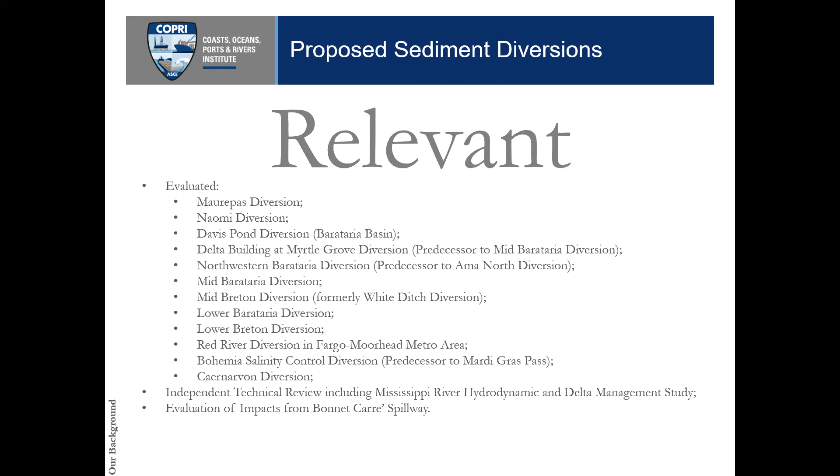And our combined relevant experience includes all these diversions. I was part of the independent technical review team for the 4 lower river diversions. But my diversion experience goes back about 20 years. I was working on not a dissertation, but the thesis in graduate school for the Maurepas diversion that did change, but at the time it was part of the 2050 coast plan that the state of Louisiana was putting forth back in the 90s. And then I worked on and off on different projects since. And then, of course, Dr. Moby Solangi has been involved in the evaluation of the impacts from the Bonnet Carré spillway and was a key member of the team for Mississippi for the BP spill.

And I think that we're just going to try to distill this down in simple terms for you all in Mississippi so that you understand, you can trust us, that we are going to talk in layman terms mostly, and that these are complex projects and they're being driven by complex processes. And I think it's important to understand them, like I said, in simple terms. We're going to first start with this video, and it's on a forum that was held both on the spillway and the diversions, and it was held last year. It was put on by the local newspaper, Sun Herald.

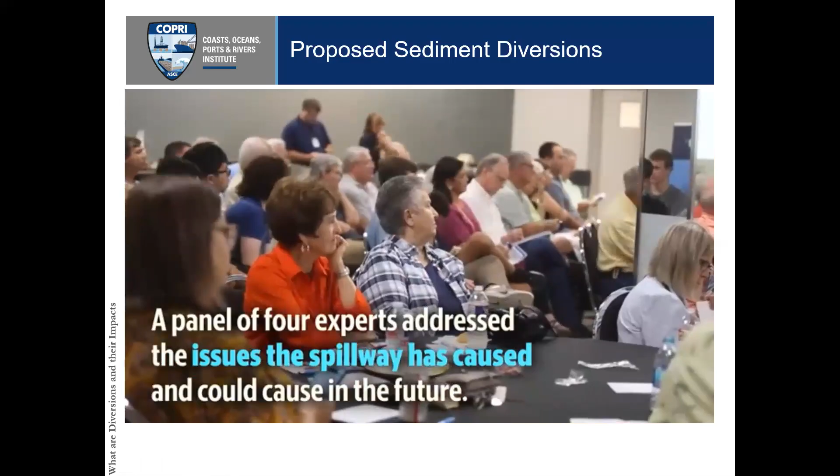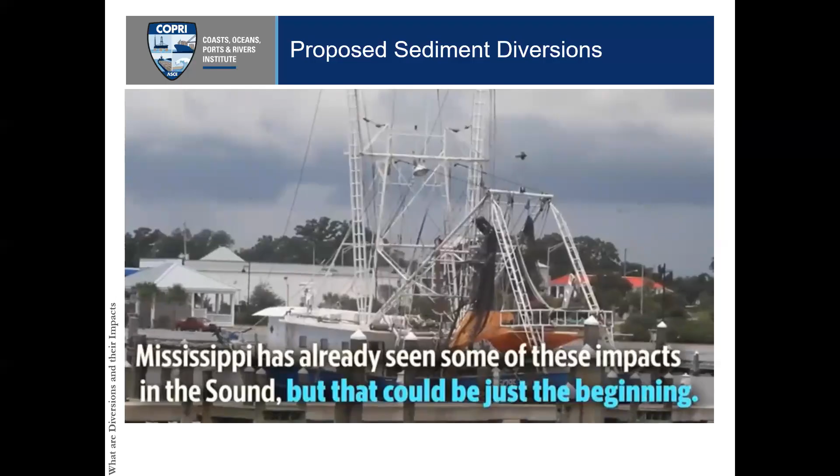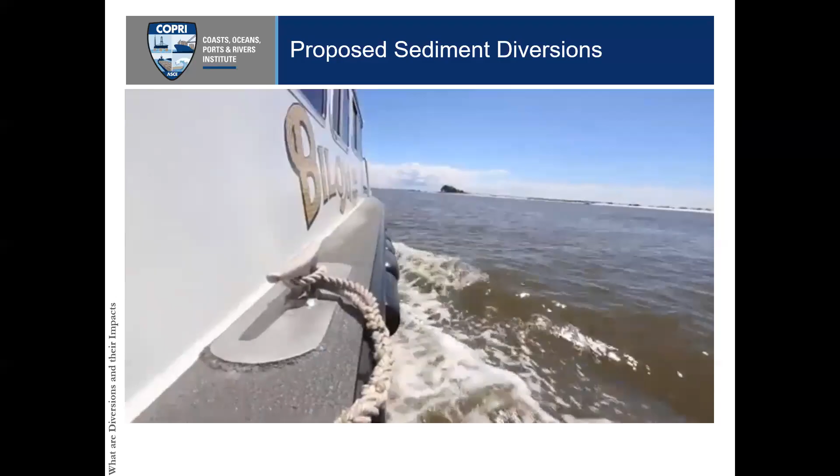What is happening is something that is a game changer, that we have never seen like this happen in our lifetime. Your life and your children's life and your grandchildren's life is about to change. In the wintertime, when the water's cooler, it's the wet time of year when you get a lot of rain anyway. That was my point. Why they couldn't get ahead of the game, when they can predict big rivers rising. In Louisiana, I'm not sure about the statistics in Mississippi, but we had a little over 60% reduction in the shrimp landings during brown shrimp season. We had 90 to 100% mortality rates on our oysters. We had a 35% reduction in our landings in blue crab. So that's pretty significant. This freshwater has taken a toll on all of our fisheries, and we're still monitoring it. We're still looking at our commercial landings and doing our assessment, but we won't really know the effects of a lot of this until a couple of years down the road.

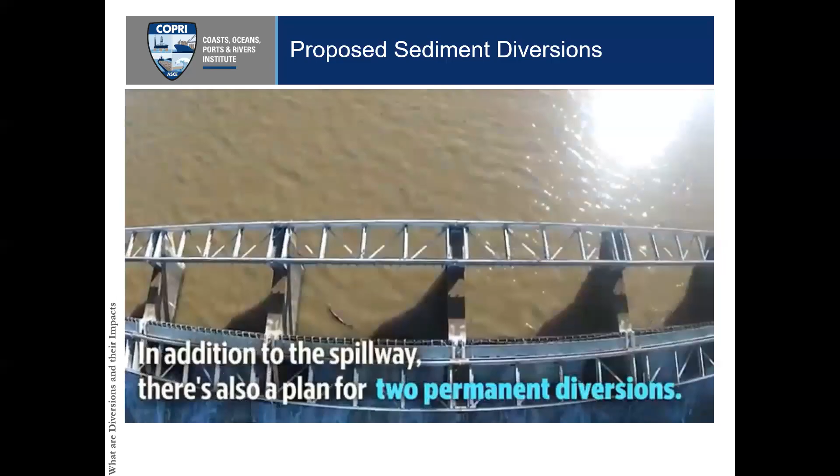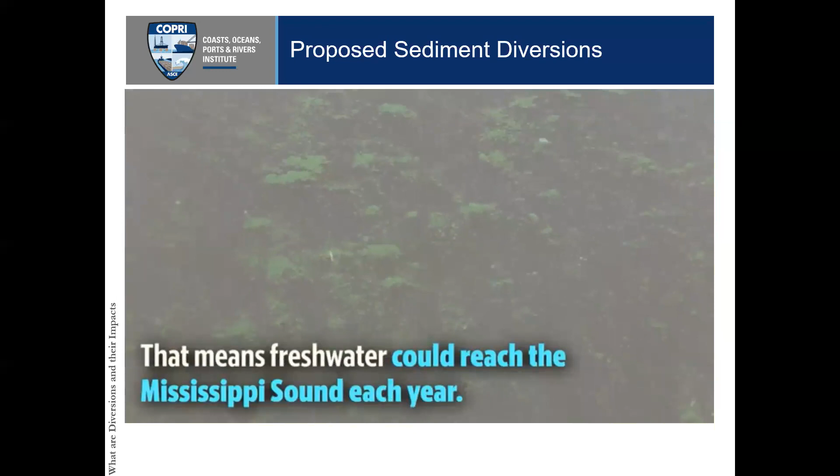But Mid-Barataria Diversion is proposed to have a capacity of 75,000 cubic feet a second, which is about half of what the spillway averaged. But this year, it could have been operated for 201 days, when the spillway was operated for 123. So it's less water, but for a longer period of time.

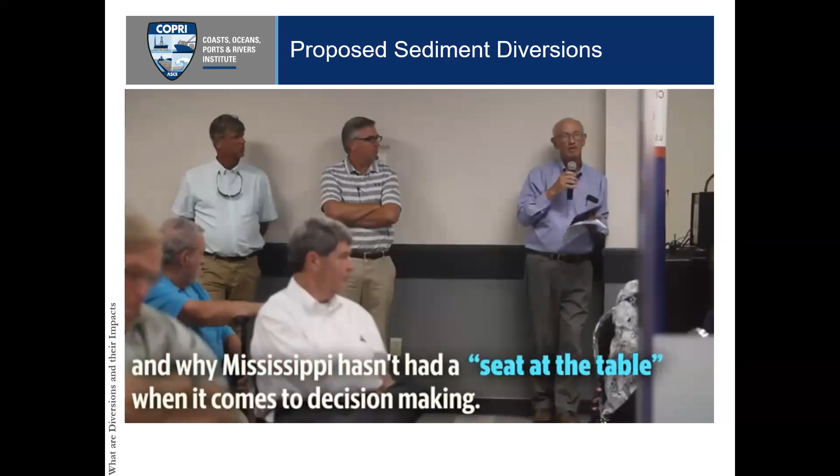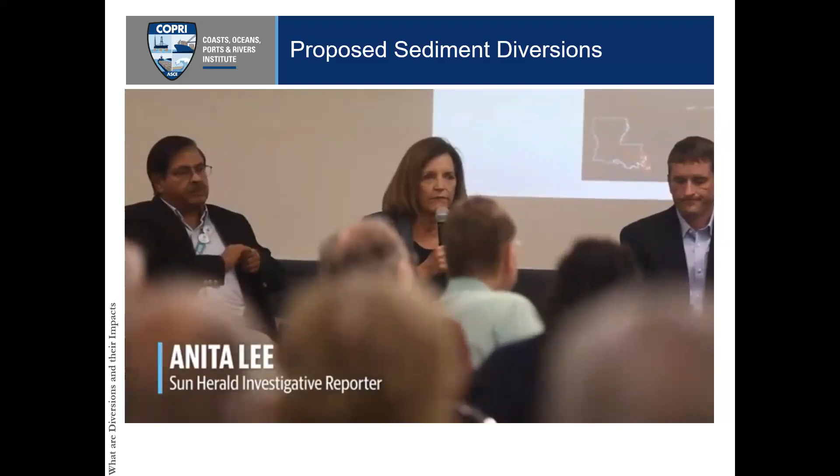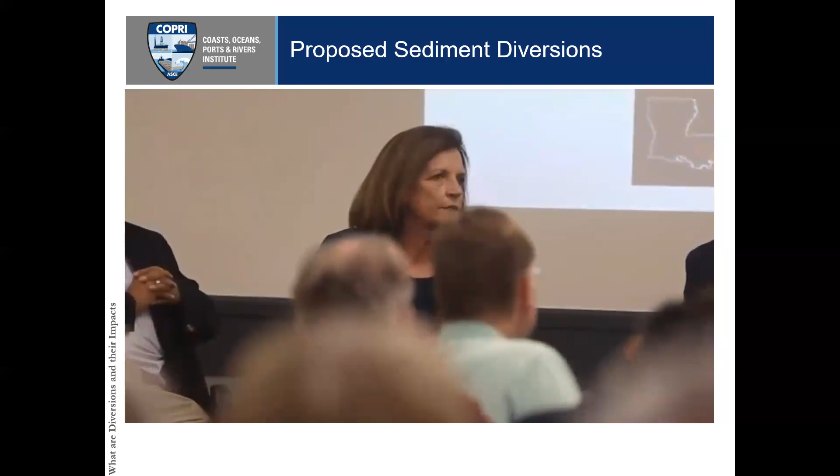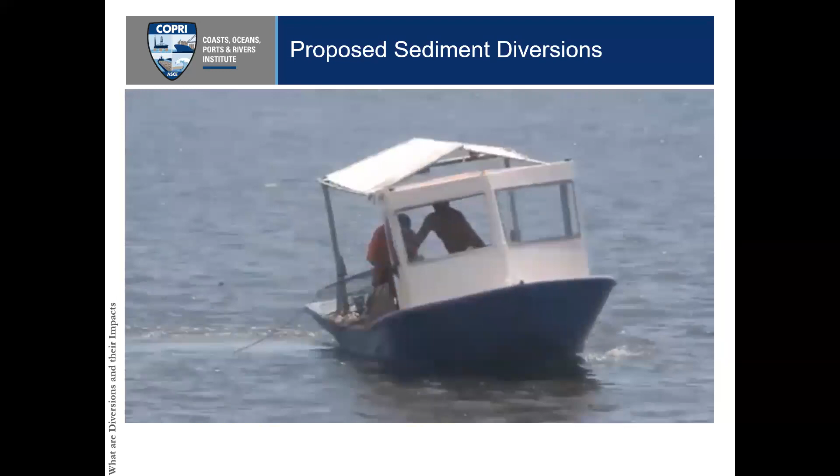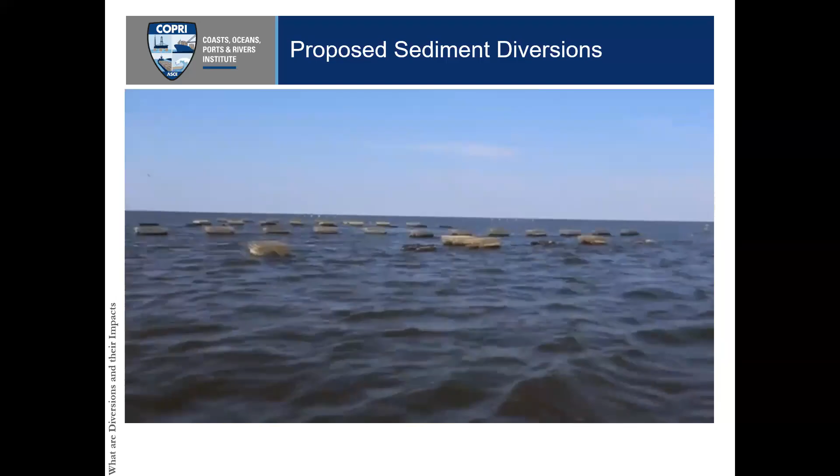But it's even more disturbing when you look at this Mid-Barataria diversion and think about how little, no thought has been given to Mississippi with this diversion, none. And I ask, is anyone from Mississippi at these Coastal Protection and Restoration Authority meetings? No, they haven't been there. Maybe they're now, but folks in this room and folks on the coast are really going to have to be responsible for getting their elected and community leaders to stand up for Mississippi in this, because nobody's listening.

And I know past studies of the environmental impacts of the Bonnet Carré really have focused on Louisiana waters. And after people started speaking up with these openings this year, they're going to include Mississippi in the current study of what the impact is.

So as you can see in that video, which had subtitles, about how serious these projects are to divert more river water. So with that, I'm going to turn the presentation over to Dr. Moby Solangi. Well, yes, thank you, Dennis. This is an extremely important issue.

And if you look at it, the basic problem we have is the Mississippi River watershed is the largest in North America. It drains the river waters from many rivers from 31 states and 2 provinces in Canada. And along with the sediment, it's also a very highly polluted river. It brings in industrial, agricultural, sewage, and other wastes. And as it comes down, you can see the Mississippi, the Missouri, the Tennessee, the Red, all these rivers, they all merge into one as they come into Louisiana.

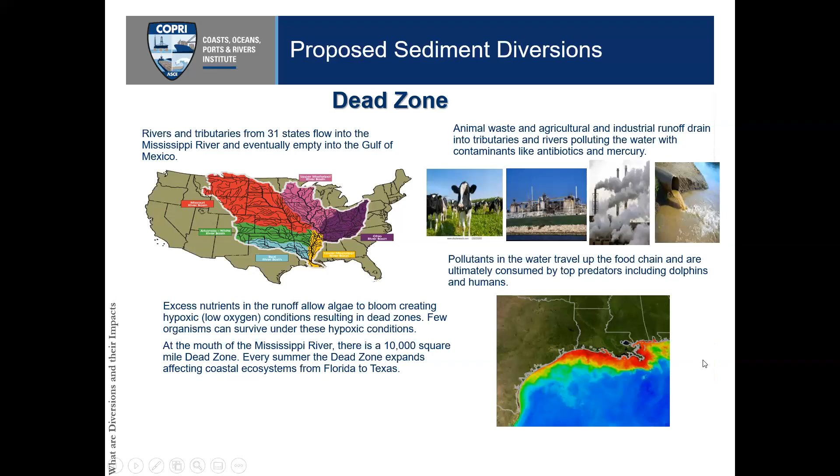And when the drain is clogged and you don't open it up and you create these little holes on the side of the drain, you get these diversions. And so you have this non-indigenous water going into areas that suffer. And I think it's important for folks in Mississippi to understand that Mississippi Sound and any of its waters are not connected to the Mississippi River. So here's the Mississippi River.

One of the studies that we did in 2019 was the effect of the Bonnet Carré spillway. Now here's the Bonnet Carré spillway. It opens into this huge lake, which is called Lake Pontchartrain. And then there's this very small outlet, which is called the Rigolets. So what you end up seeing is, first this has to fill up. This becomes like a freshwater lake. There are also other rivers that flow into Lake Pontchartrain. So this is a constant impact. But when trillions and trillions of gallons come into the non-indigenous areas, there's an impact.

But if you look at it, this particular map was done on April 15 to 21 when the Bonnet Carré had opened. The lighter color shows you low salinity, and the red color shows you high salinity, and as it changes, you see a gradation. But look at this area. There are 5 different diversions, and I'm sure that Dennis is going to talk about them. All of this is fresh water. And if you're looking at the geography, folks in Mississippi need to realize that this is Mississippi Sound, this is Breton Sound, and this is Chandeleur Sound.

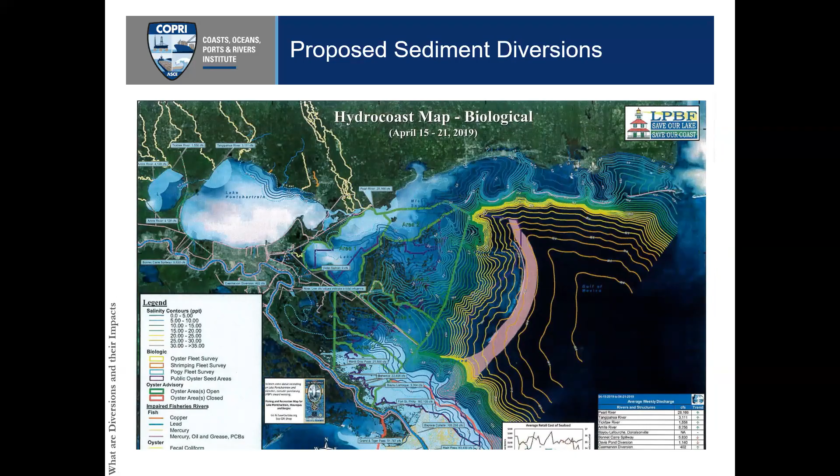So when you cut off the legs and hands of part of the ecosystem, the rest of it is going to suffer. And what has happened, you want to go to the next slide? What we saw was, due to the impact of trillions and trillions of gallons of river water, and I hate to use the word freshwater, people think it is a spring flowing in. This has so much pollutants in it, and insecticides, pesticides, hydrocarbons, all sorts of fertilizers.

Now, remember, these are top predators. They are basically the canary in the mine. They are the biological indicator of the environment. But they also serve like a black box. They store the information in their bodies, like their blubber will accumulate the insecticides and pesticides. And so these animals, as we study, reveal what may be going on.

For example, when you look at their teeth and you section them, just like a tree, there are little circular areas of their development, and you can tell at what stage in their life they were encountering some stressful events. So these black boxes become an important tool, so do the sea turtles. So we had some, next slide.

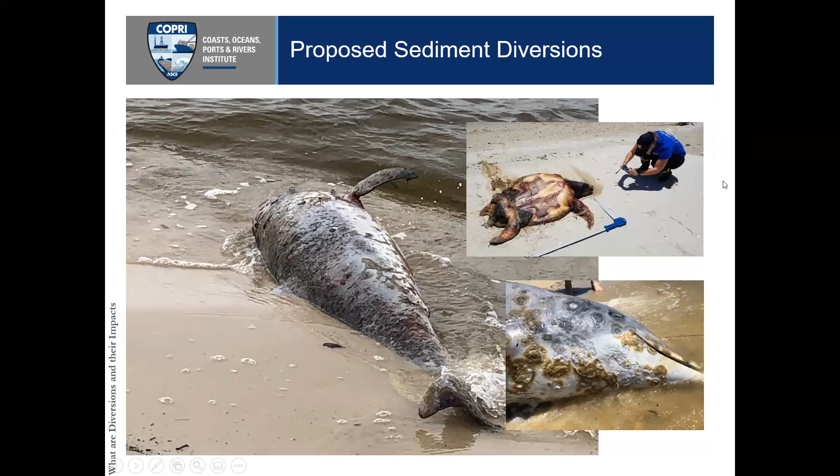Now, if you look in 2010, we had 91 dolphins and 309 sea turtles that we recovered. And this was when we had thousands of people in remote areas looking for animals, islands, marshes, cleanup crews all over the place. The most we found was 91 dolphins and 309 sea turtles. Most of the sea turtles were the most endangered sea turtle species, the Kemp's Ridley. We do have 5 species. We have the loggerhead, we have the Kemp's, the green, and so on and so forth.

But the Kemp's Ridley, the Mississippi Sound has the highest population of Atlantic bottlenose dolphin in the United States. It is also a nursery for baby dolphins, and it's also a critical habitat for the Kemp's Ridley sea turtle, which only lays eggs in Mexico, and the adults spend their life in the United States. And so a turtle has 1 in 10,000 chance of becoming an adult. And these long-lived species, if their adult dies, it takes many, many years for them to reproduce and recover.

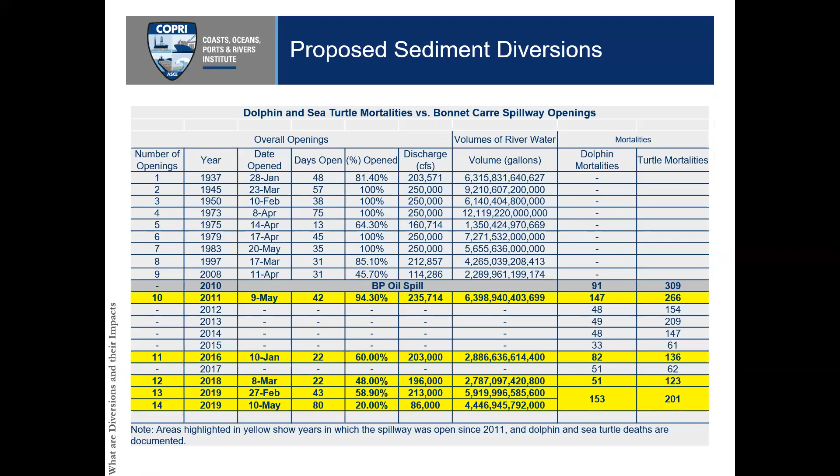Next slide. You can see how after the opening of the Bonnet Carré spillway, you can see these orange lines showing the tremendous increase in the bottlenose dolphin strandings per month. And here you can see the areas that were seen in abundance in terms of strandings. One of the reasons Louisiana was less is political. The Louisiana Department of Wildlife was under a lot of pressure, and I'm sure Dennis will be talking about the waiver. They didn't want a lot of these animals to be recovered.

They decided not to respond, and NOAA had to come in to find out where the animals were dying and the cause of death. So there was a little bit of a lag in the scientific data, but still the numbers in Louisiana were second to Mississippi.

We did have some hot spots in the panhandle of Florida and Alabama, but that was because 2019 was a wet year and the indigenous rivers probably had some impact, but here is where most of the impact was. Next slide.

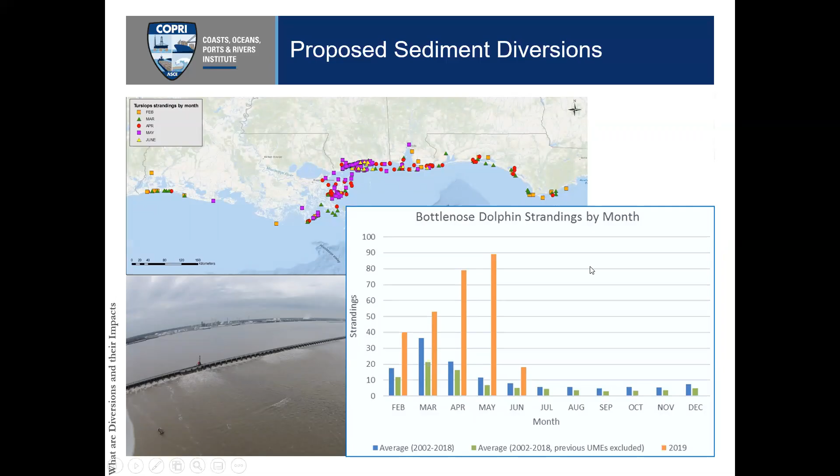Here's the problem, and I'm going to let Dennis kind of chime in as we discuss this subject. The Mississippi River, we human beings have changed its course, and to maintain its course, we have levees, we have diversions to keep that river in this particular course. Its natural course was through the Atchafalaya Basin, and of course, to protect it from flooding, it was distributed 70% going this way and 30% going through the Atchafalaya Bay.

But the irony is that those flood-prone areas have now been developed, and now the Corps of Engineers has to go and protect it. So as the river flows down, you've got the Morganza spillway. There are some regulations that say at what speed of water that one spillway would open, and the Morganza hasn't opened, as far as I can remember, for the past 25, 40 years. All the water comes down, and the Morganza spillway was to protect Baton Rouge, and then of course the Bonnet Carré to protect New Orleans.

And then of course you have all these other diversions that are putting out water into the Breton Sound, and indirectly through Lake Pontchartrain into the Mississippi Sound. So we have a very serious problem. It's not just the salinity issue. We have nutrients, we have insecticides, pesticides, and so on and so forth. This is a very rich fishery area on both sides of the river. Dennis will talk about many other factors that have caused the land loss, not just the way the Mississippi River water has been channeled.

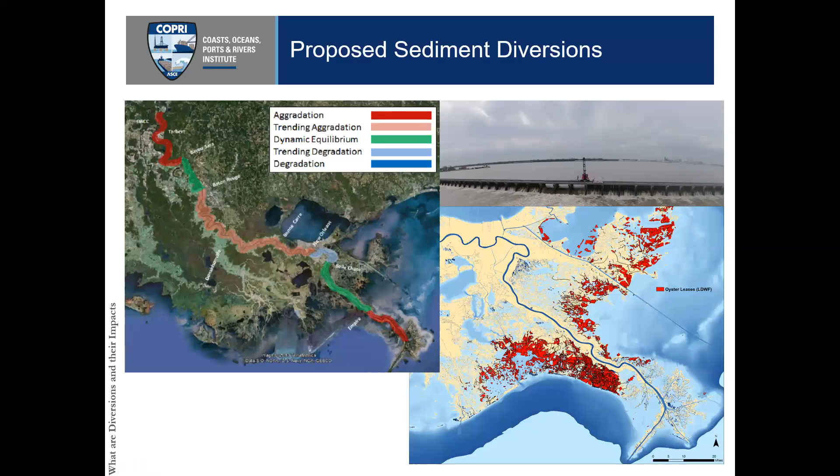Thank you, Moby. Okay.

And so I just want to follow up on Moby's comment. A lot of different interventions have been done on the river to manage it over the years, and the idea of diverting sediment out of it actually is not a new idea. It was discussed and debated 150 plus years ago in New Orleans.

So the state of Louisiana participated in a federal study. It was named the Mississippi River Hydrodynamic Delta Management Study. It is a study that was abandoned by Louisiana, which withdrew as a sponsor, but it did help construct the initial basin-wide model. And the models that were used, they were coupled with other models, including some vegetation models, and they predicted that the river water inundation on the brackish marsh will create a significant biomass loss of up to 66%

in 10 days. And of course, all federal studies of this nature have a peer review panel, and they reviewed the output, and they determined the mortality could be on the order of 50% within 2 months. So the natural process of converting this estuarine system into a lower salinity system will create a die-off. It will not only impact the vegetation in the brackish marsh, but the benthic communities and all of the species in the food web.

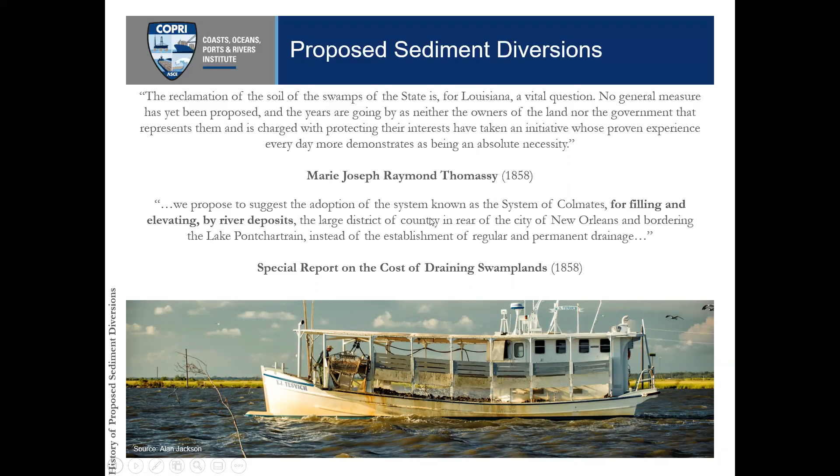And the language is very similar to the purpose and need of the sediment diversion projects, and that is river water charged with alluvium to be directed upon the land and to create the sedimentation process that is equivalent to delta building. And there are several reports. I'd be happy to share those with anybody viewing this presentation.

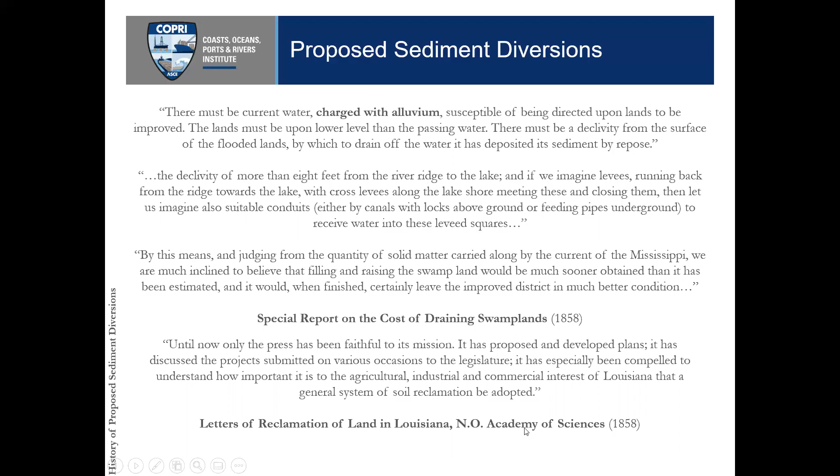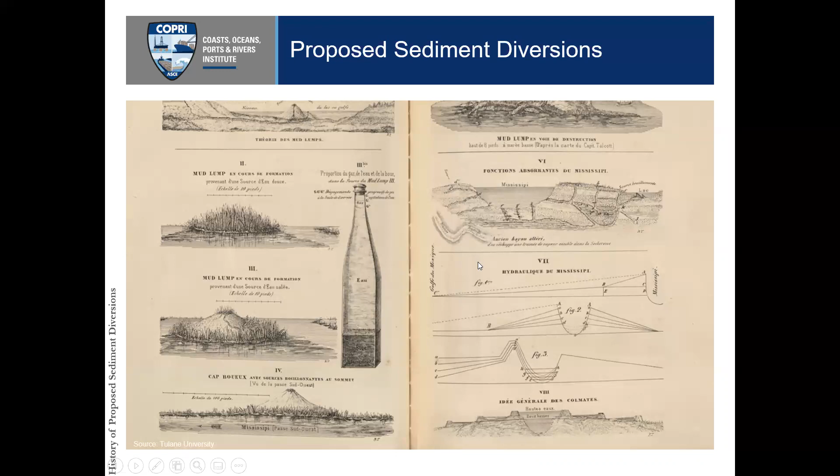The concept of diverting the river reemerged in the early 1970s under the guidance and leadership of Woody Gagliano. He was the first one that drew a map in recent times where diversions were proposed. And then it got documented in the Comprehensive Master Plan in 1993, then into Coast 2050. And of course, we had the EIS for both Davis Pond and Caernarvon; it actually started in the 80s, and all of that sort of built up into what is called LCA, the Louisiana Coastal Area, which was authorized right during the year of Katrina.

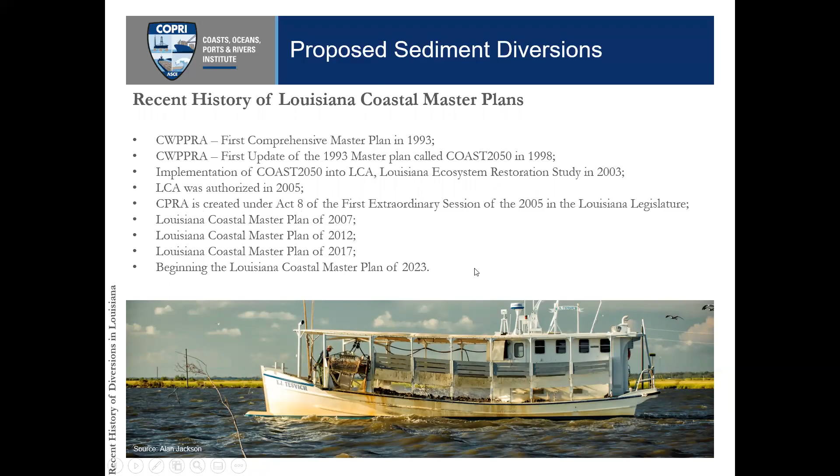And then after Katrina, the CPRA was formed, and it was mandated every 5 years that a coastal master plan be passed by the legislature. The next master plan will be in 2023. So these two projects are in the master plan, and they're being brought forward under an alternative delivery method called construction management at risk. And we will go over both of them, the first one being Mid-Barataria. They're very near each other, within 10 river miles, and one's on the left descending bank and the other's on the right descending bank. And they're both 75,000 CFS.

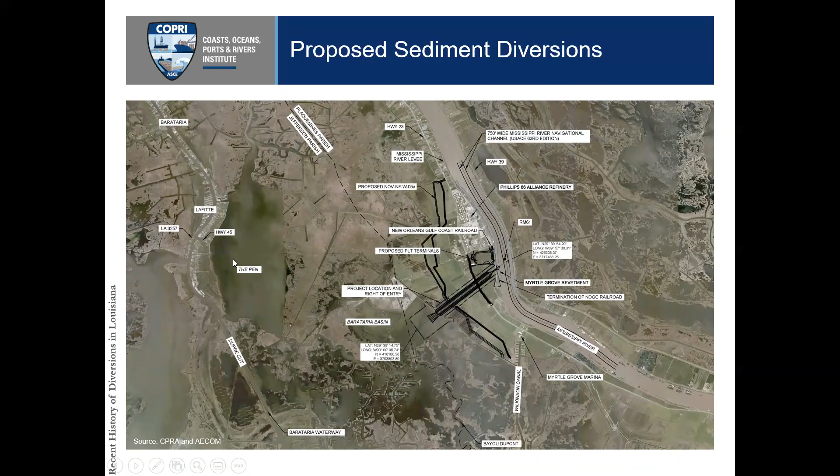So Mid-Barataria, it's a hardened diversion canal, if you can see that. And at the river, there's a Tainter Gate complex, and there's an outfall, and it's going to penetrate two levees. One is at the river, and one's a hurricane protection levee, and it will go across an existing railroad right-of-way and LA 23, so there'll be bridges built, and there'll be other facilities that will need to be modified. Here's a closer view of it. Here's the riverside where the Tainter Gates will sit in the hardened channel, and the different transportation facilities and levees that it'll penetrate.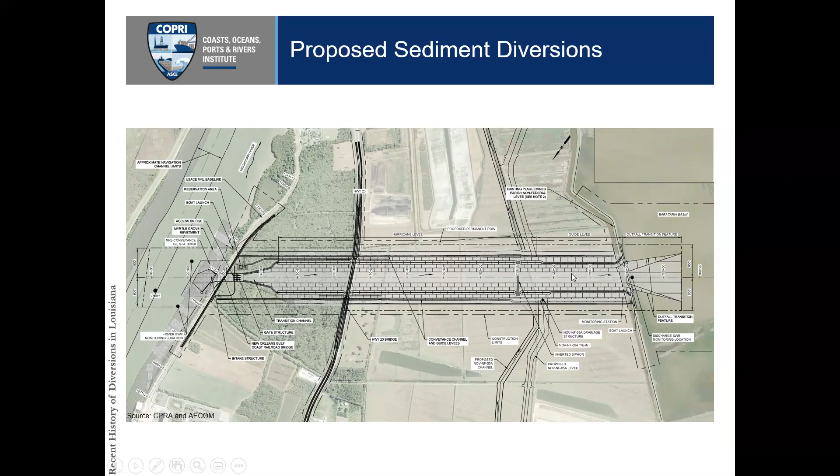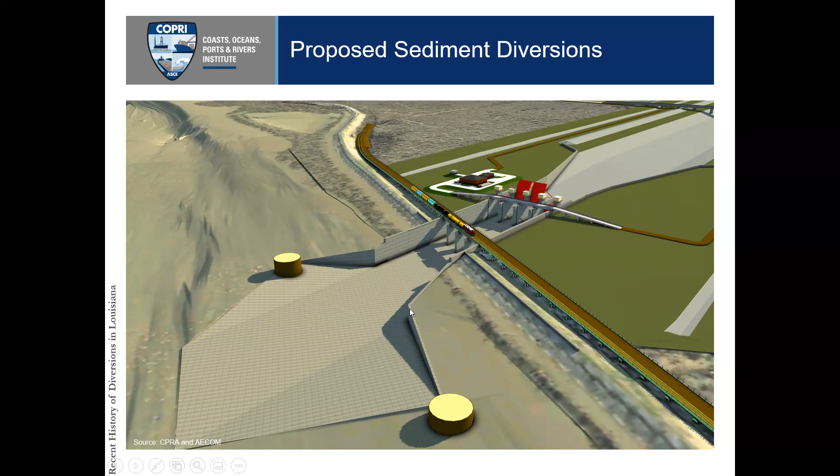Here's a rendering of the intake at the river. The river water will go through this intake structure and through these Tainter Gates into the diversion channel. That's just a closer image of it. It shows the enormity of this complex and the scale.

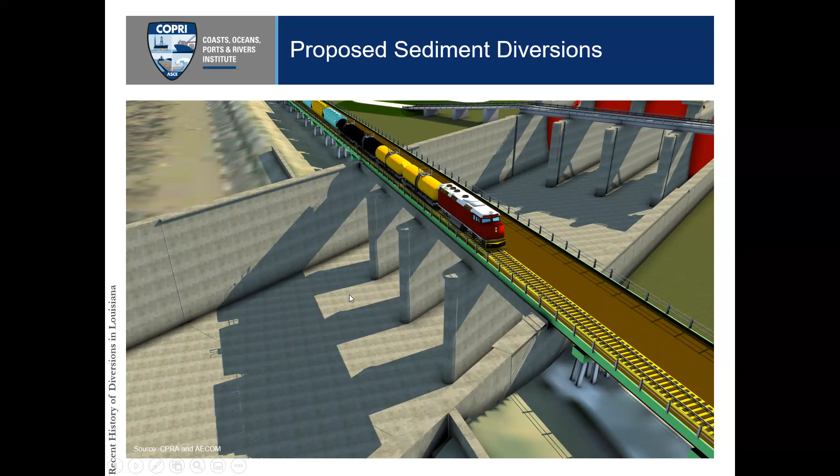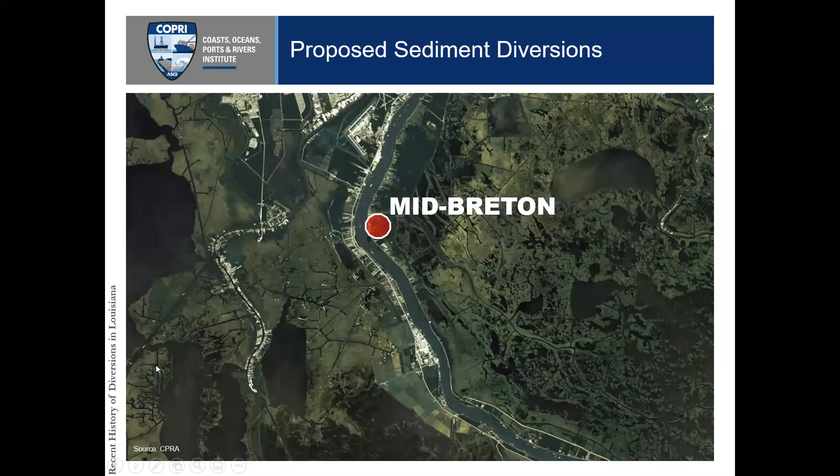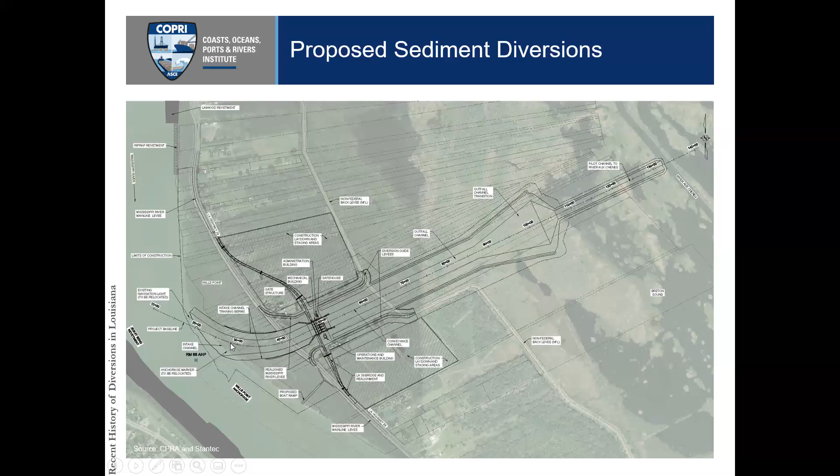Mid-Breton, which is on the east side, on the state of Mississippi side, it's laid out. There are some similarities and some differences, but it also has to penetrate the river levee, and it does cross a highway there, which will be elevated, and then through a hurricane protection levee. And this is just a rendering of what it looks like. Again, there's some Tainter Gates there.

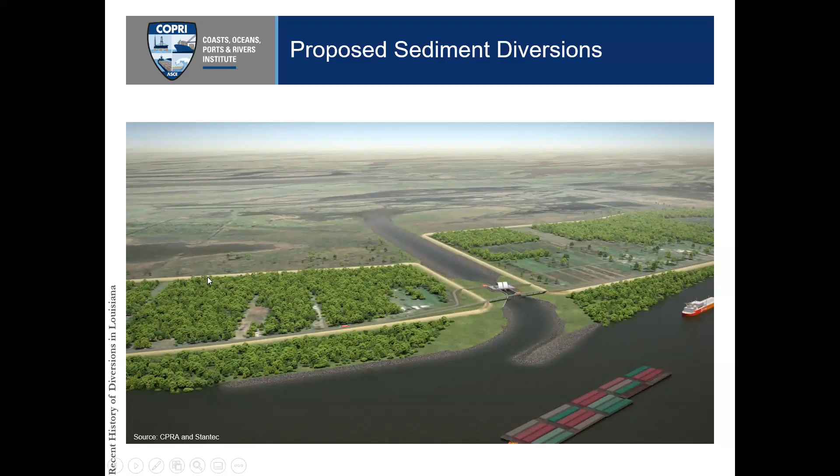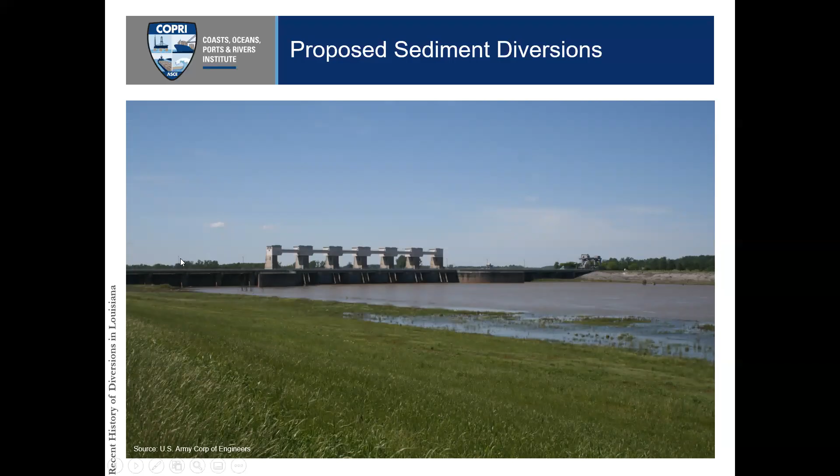So these are some Tainter gates that you can see that are in place at the Old River Control Complex, which is at the confluence of the Red River, the Atchafalaya River, and the Mississippi River. And they're very large. The capacity of this structure is much larger than the diversions, but it does give you some idea of the scale of these heavy civil works projects.

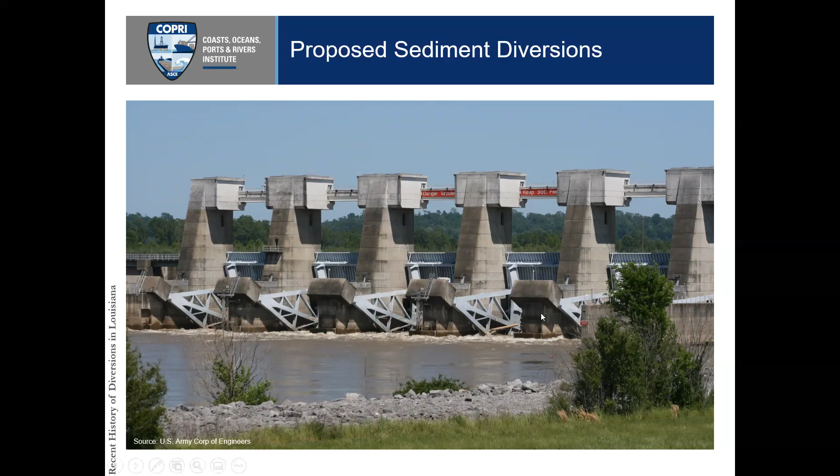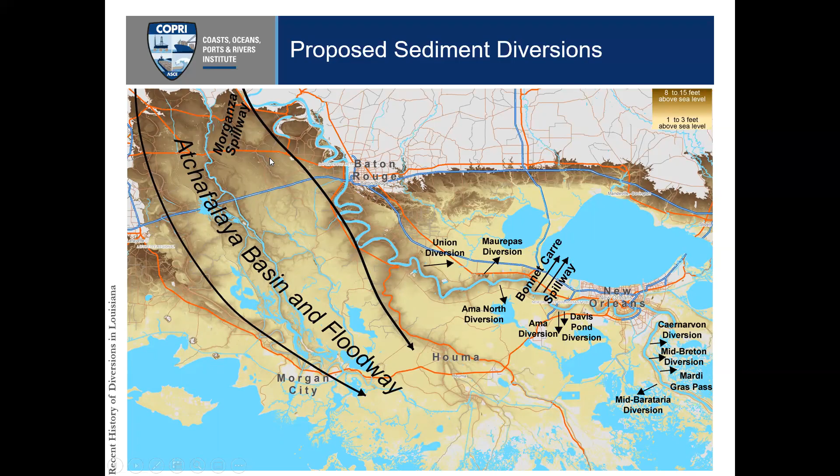Again, if you look at the Old River Control Complex, you can see that very similar structure. You have a very similar diversion channel that was used for a hydropower plant that is in place today. It's about 100,000 CFS capacity, roughly. And they have a hardened channel that diverts the river into this power plant.

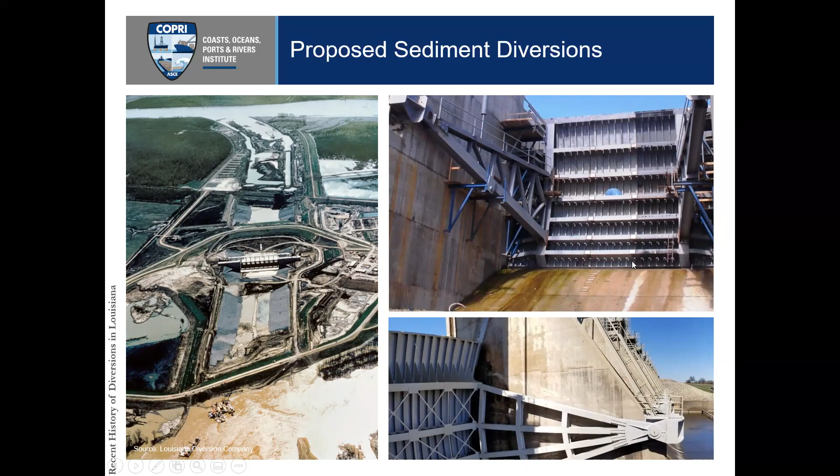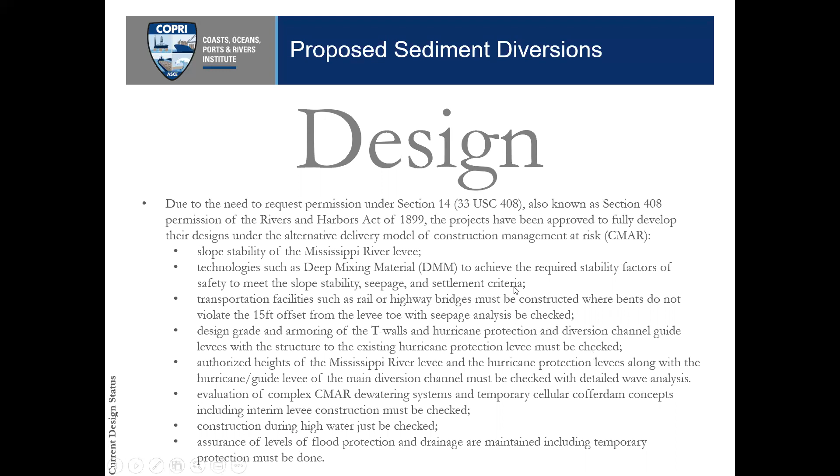So some of the design issues that come up, and again, why they're using the alternative delivery method of CMAR, is so that they can get a 408 permission. It allows them to advance the design up to 95% and deal with issues like slope stability, deep soil mixing, offsets, tie-ins, etc. Concurrently, they are processing the project through NEPA to get a 404 permit and a Section 10 permit. And of course, they follow the guidelines set by the legislation that was passed in 1969.

However, they did take advantage of some programs. One is the FAST Act, which is an expedited permitting process. It allows for all of the partners to be housed in one dashboard. They also did get a congressional waiver of the Marine Mammal Protection Act. And there have been attempts to redefine the essential fish habitat. And we'll get into that.

One of the things I think is important to remember is that the Oil Pollution Act, which sets the NRDA standards for collateral injury, does not apply to Mid-Breton because right now they're not seeking NRDA funding. However, it is still all BP settlement money, and I believe that the collateral injury standard is something that should be adhered to for the Mid-Breton project.

These are all the tools for all the computer modeling nerds that are watching today. They are working off of the Delft3D basin-wide model. They will do a project level model for Mid-Breton. They are using the MIKE suite of tools that are available. These are very complex and very powerful software. They will also use, I know on the Mid-Barataria diversion channel, they're using FLOW-3D to look at what's going on within the diversion channel itself.

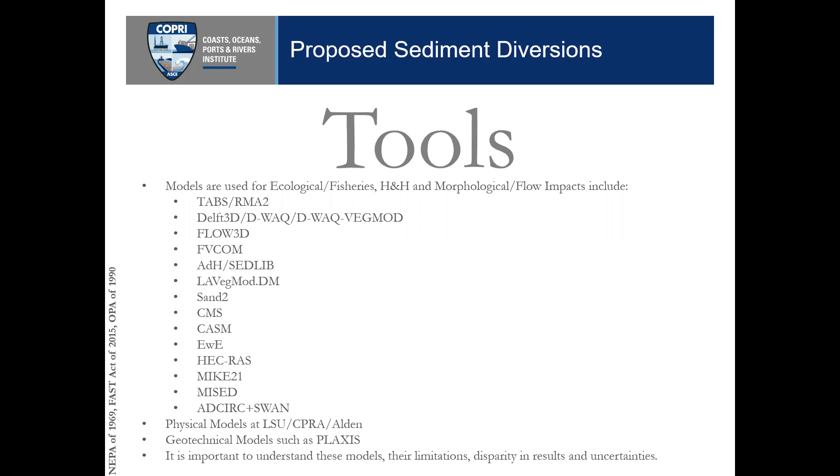This is just some of the language that was in a letter that was written in July of 2019 regarding the definition of essential fish habitat. And they're looking for it to be modified, as it states at the very bottom: modifying the essential fish habitat language will better allow for the implementation of the Louisiana Coastal Master Plan by reducing a project's legal hurdles. And of course, these two diversions are in the Louisiana Master Plan. And the outfall of these two projects are essential fish habitat for many federally managed species.

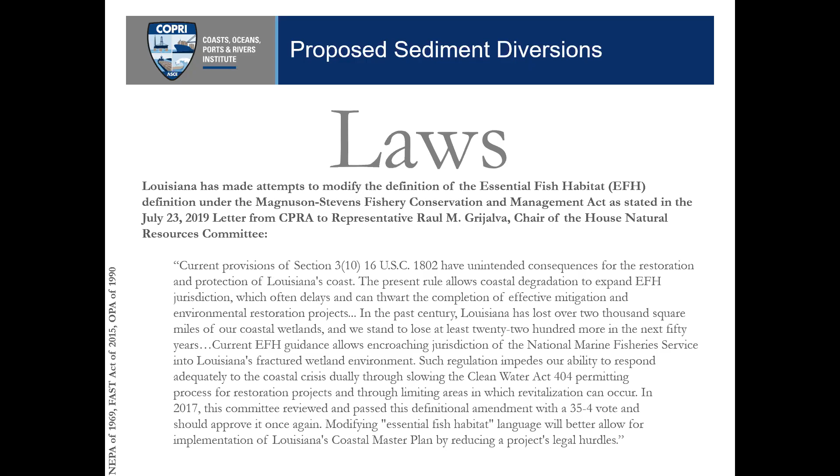They did successfully get a waiver for the Marine Mammal Protection Act, and it was put in the Bipartisan Budget Act of 2018. They first were seeking an administrative route for a waiver, and they got some pushback from NOAA. And so in early 2018, they had this amendment stuck into the budget bill, which allowed them to get the waiver.

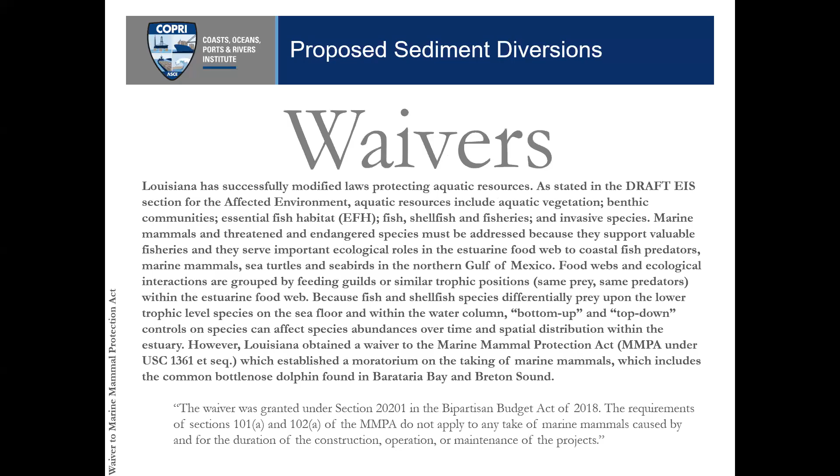On the Mid-Breton project, they have been just finishing up their scoping period. They had sessions online throughout July, and they allowed comments to be submitted until around mid-August; August 16th was the deadline. The draft EIS will be out in the fall of 2022. The formal comment period will end in the fall of 2023. The record of decision is scheduled for January of 2024.

And below that is the Mid-Barataria schedule. And I suggest that the state of Mississippi and all the stakeholders and all of the engineers that work for the different entities in the state of Mississippi get engaged in this process.

Some of those tenets that we all hold dear were mostly started after the 1969 NEPA Act was passed by Congress: the Marine Mammal Protection Act being one, the Endangered Species Act, and the Magnuson-Stevens Fishery Conservation and Management Act.

So these projects all have these guidelines that they have to follow, and the tenets that the state of Mississippi should follow should protect the fisheries, the endangered species, the oysters, oyster reefs, the shrimp, the crabs, the submerged aquatic vegetation, the habitat, also the Mississippi Sound, which has many dolphins, your beaches, your tourism, etc. So I suggest you stay engaged, watch for waivers and amendments to these important conservation acts.

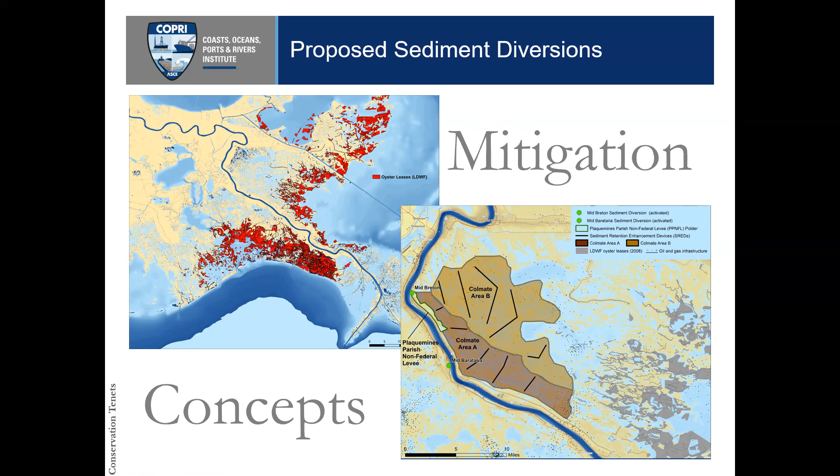Again, the waiver, which I think came as a shock to many people in Mississippi, basically specifically exempts Mid-Barataria and a project in the southwest part of Louisiana from having to comply with all of the parts of the Marine Mammal Protection Act, which basically is the taking of an animal. And the NGOs that endorsed it are part of Restore the Mississippi Delta, and include EDF, the Audubon Society, the National Wildlife Federation, and some Louisiana NGOs. So it is important that you all track this carefully.

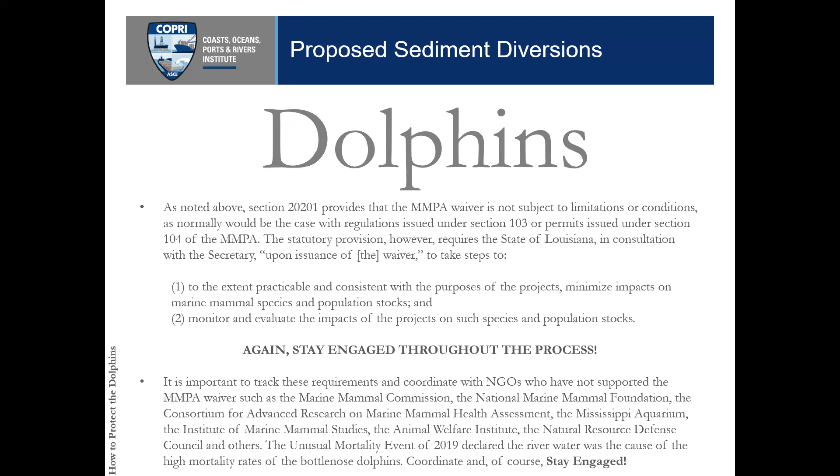Yeah, I really, really appreciate being a part of this. This is very important for the state of Mississippi. Mississippi has never had a voice in these matters. We have no representation on the commission. We have been a dumping ground for a very long period of time. And I think it is important that we realize that what we have on the Gulf Coast will not exist if this continues. And so the reason why we live on the coast and enjoy the coastal environment, the recreational fisheries, the commercial fisheries, the tourism, is going to suffer.